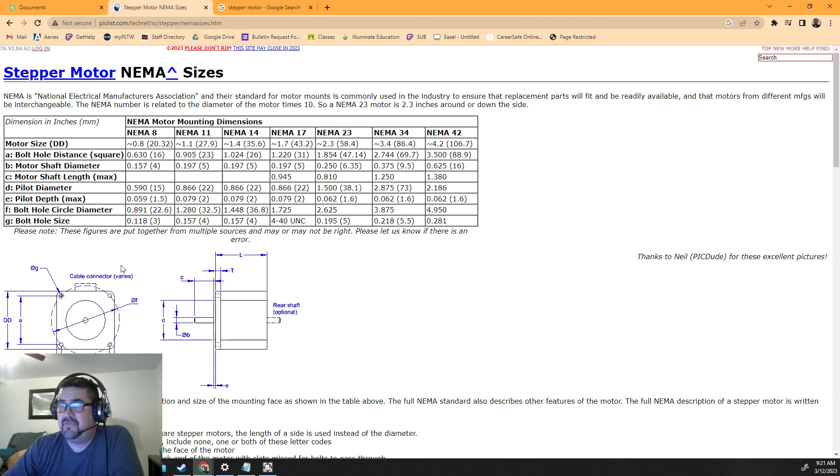I searched bolt pattern on NEMA stepper. Do not always trust these charts. Double check them with a dial caliper. If you're really close to these numbers, these numbers are probably the exact ones.

So if you look at the bolt pattern right here, it says A, let's see if I can zoom in for you guys. This is A right there, and that's from here to here, which is from here to here. It's also A, it's the same thing. And A is right here.

And I think we have a NEMA 17, or is it a 14? I think it's a NEMA 17. That's definitely the most common one. But if that's the one, it's 1.22 inches from one to the next.

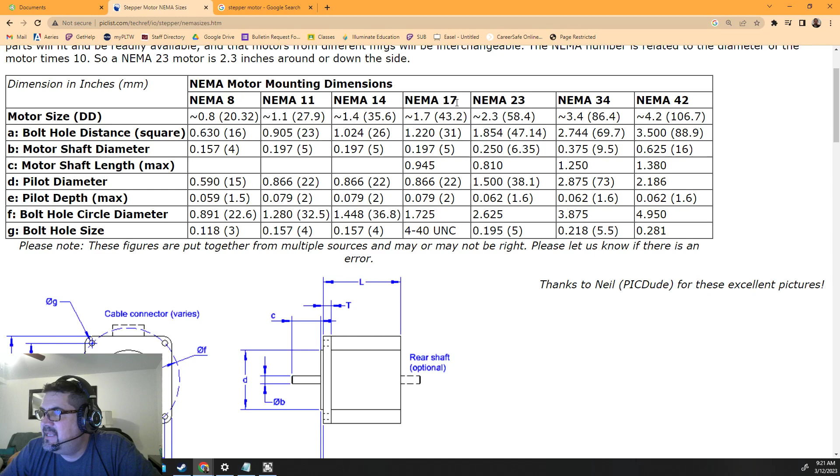What does NEMA 17 mean? 17 is the motor size, or what's called the faceplate size. So this entire faceplate, DD right here, you see this DD, it says DD right here. That's all the way to the top, all the way to the bottom, or from the right to the left, the whole entire plate. The holes, however, are a little bit smaller than that, in between anyway.

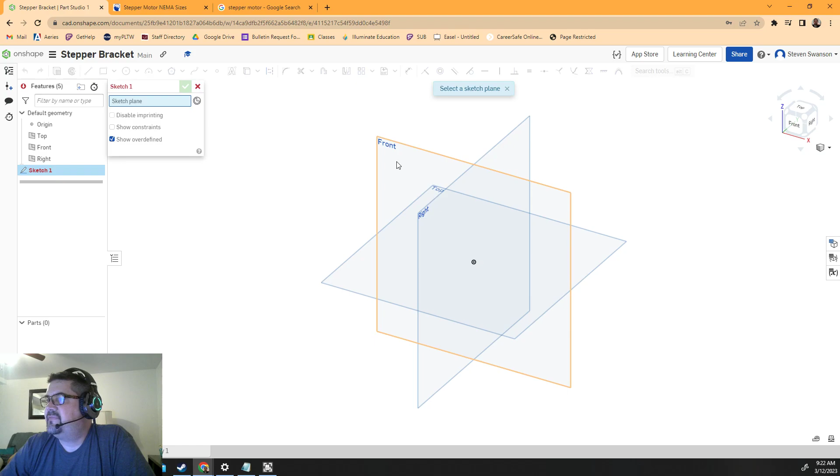So let's go ahead and start doing that. Let's create a document. We'll call it stepper bracket. And here we go. I'm going to go ahead and sketch the faceplate on the front plane, and I'm going to start, everything if you can do from the center works great. For example, I'm going to get a rectangle and say center rectangle, because I'm going to assume that this is like where the shaft comes out, and it makes it easier later on for bolt patterning around a center point, if that's the shaft of the motor right there.

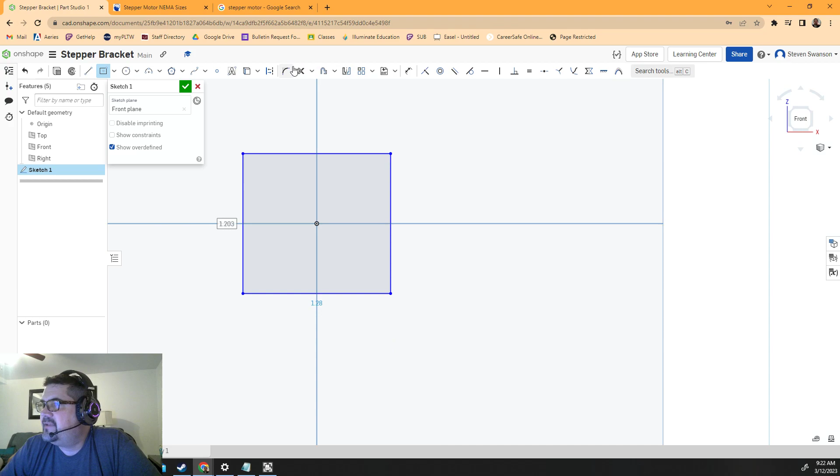Okay, so we know the entire faceplate is on a NEMA 17, assuming that you have a NEMA 17. I don't know what you have, you want to look it up. So this is the entire faceplate, it's 1.7 by 1.7. Okay, so that's the entire faceplate. You can make it bigger than that though, if you want. So this will make it where this is the exact size of your stepper motor.

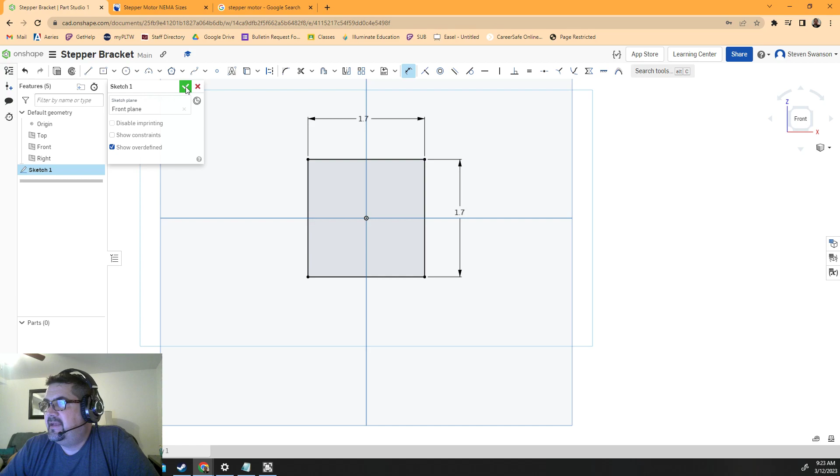Okay, let's go ahead and extrude that out. For me, I'm going to extrude this really thin, I'm not going to make it very thick here. So I'm going to make it like 0.05, and we'll try to strengthen it later on. What else do we need to know? Okay, we need to make those holes, right?

Definitely, so we need to make this distance A right here. Look at D right here, it says pilot diameter. So there is a diameter, this little circle in the middle. They're not showing that circle here, but I think they're talking about that here.

Again, you have dial calipers, go ahead and measure it, how big that circle is. There's this little puffed out circle that comes out right here. You can see it actually right here and right here. It just comes out a little bit.

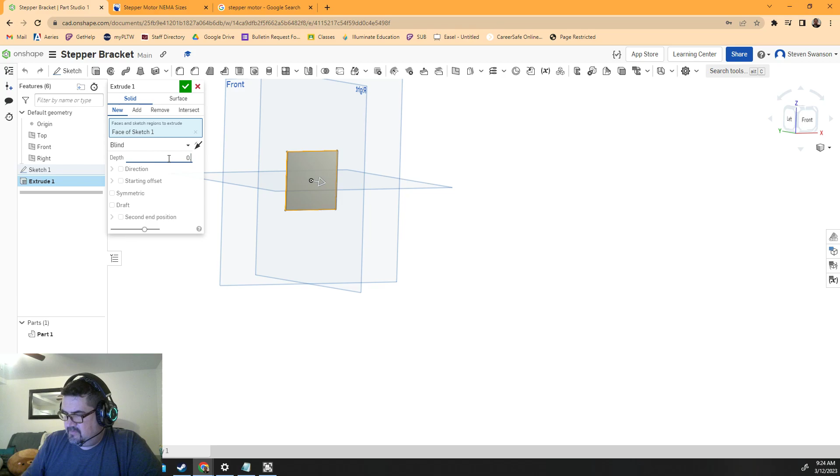How far? It comes out E, which is pilot depth on a NEMA 17, is 0.079. So actually, I think I'm going to go with making my material that thick. I think that'd be cooler, so that the metal's almost flush. So I'm going to round up a little bit, 0.08. I'm going to go back to my extrusion right here and just make it 0.08. I think that'd be really cool, because otherwise it would hang out a little bit, and it should be totally flush to that. So that's kind of cool.

All right, let's sketch the front of this, and let's get to it. Let me make sure I'm doing the right side here. Sketch this side, there we go. I'm not sure if I clicked the wrong side. I'm going to click this thing again, the center rectangle, and click here.

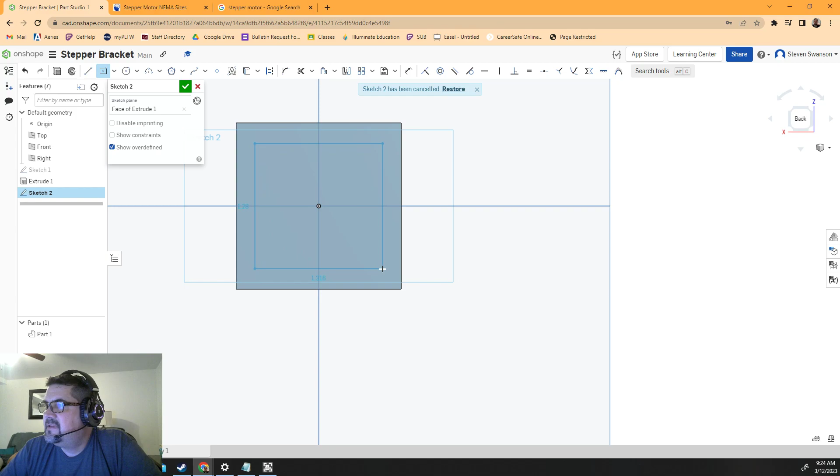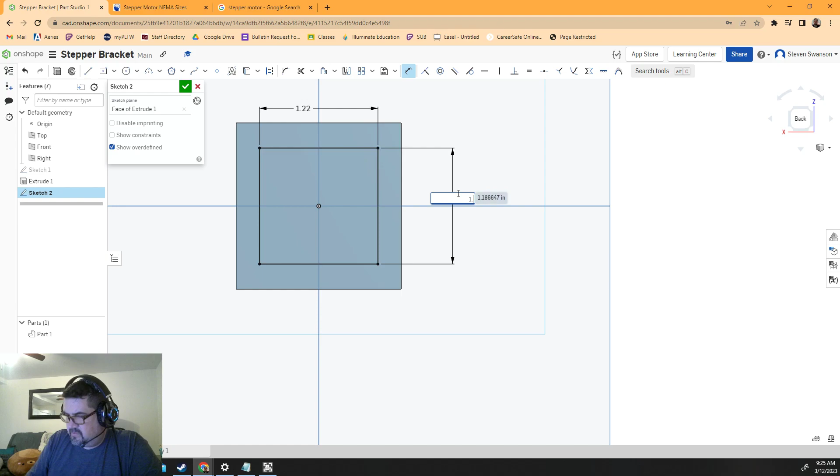And I'm looking for this bolt pattern right here, this A right here, bolt hole distance on a NEMA 17, 1.220. So let's do that. 1.220, and I'm going to make this entire square.

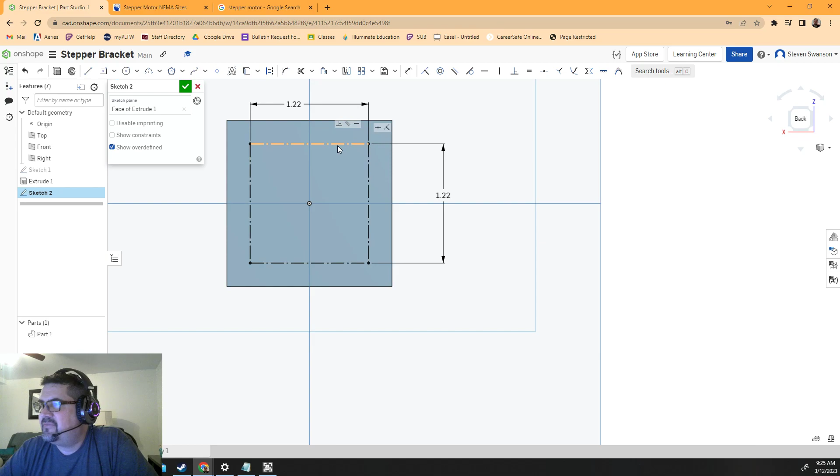How can I select it? I got to push escape. I'm going to click all these lines. I don't need this square itself, like I'm not going to build a square, I just need it to come up with these four corners. So I'm going to make it all construction, in other words, I don't want to be able to mess with it later on, I just need it for a guide for these corners.

You could probably use a pattern feature for this. For me, it's only 4 holes, so I'm just going to go ahead and do that here. I don't know if it says how big those holes are, but once again, you have a dial caliper.

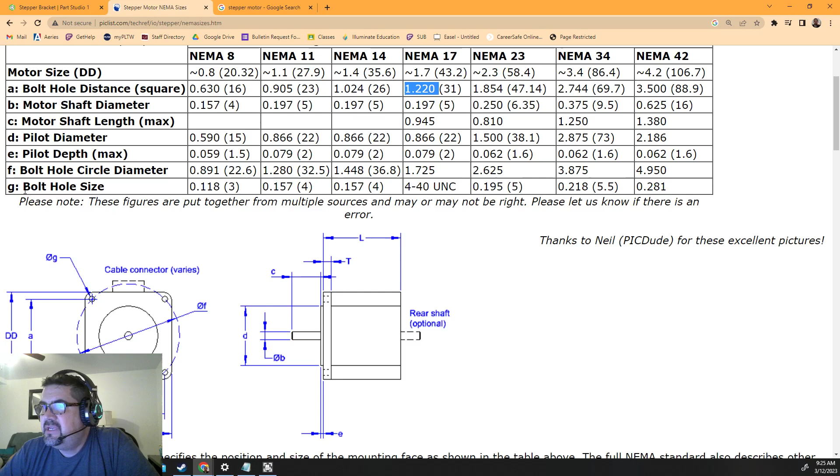You can measure. Here's the diameter of the bolt size hole. It is a NEMA 17, which is a 4-40. Interesting, I always thought it was like an M3 screw. So 4-40, what is that? You can go screw size, screw diameter. There it is, that's the screw.

So I'm going to round up a little bit to like 0.13. Make sure it's a little bigger, just in case, you know, I don't want to be fighting with it later. 0.13, and obviously I'm just going off of charts on the internet.

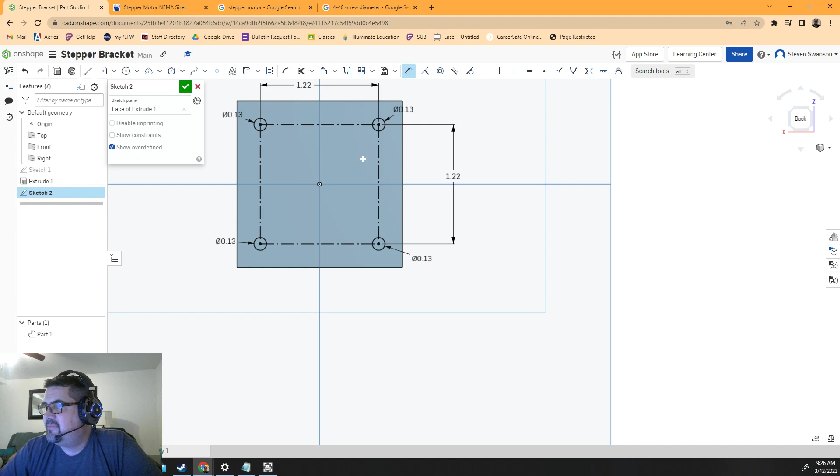I don't have one in front of me. If I had a stepper motor in front of me, believe me, I would measure it, because you know how long it takes to 3D print something, right? I don't want to sit there and 3D print and design all this because I assumed it was all this, when I literally have in class a stepper motor. I have a dial caliper. I could just measure this real quick and double check these numbers. It takes me 2-3 minutes to do that. And then I'm not wasting hours and days printing and then coming back and it's not the right fit. So just measure it, you got it in front of you. Just double check that you're really close to these numbers.

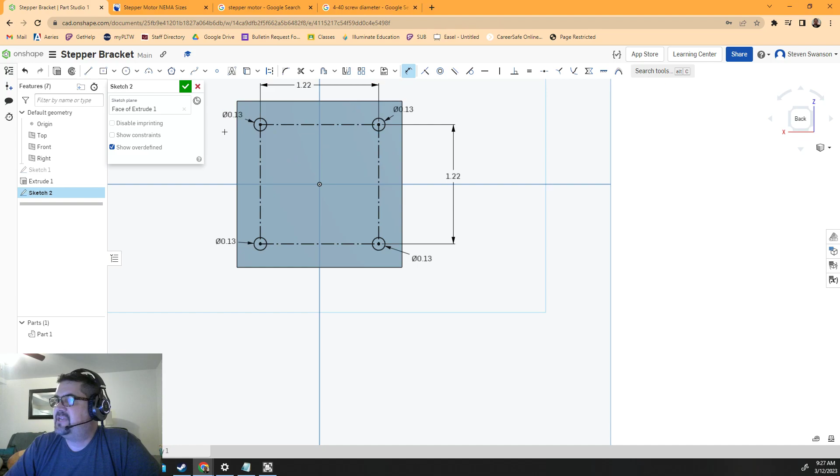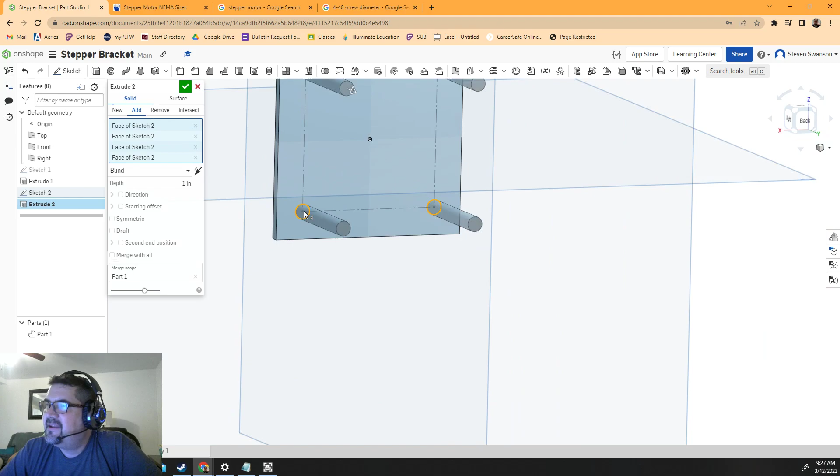All right, so check mark. Let's make those holes. So extrude, we're going to click that hole, that hole, that hole, that hole. Notice the square, I can't click it because it's a construction line, and that's kind of what I wanted. I didn't want this to extrude 3/4 of a circle. Then I have to click that little corner right here. You know, you could do that, it wouldn't be a big deal, but why do that? Okay, so remove, I'm removing those holes. Done, so I got the bolt pattern.

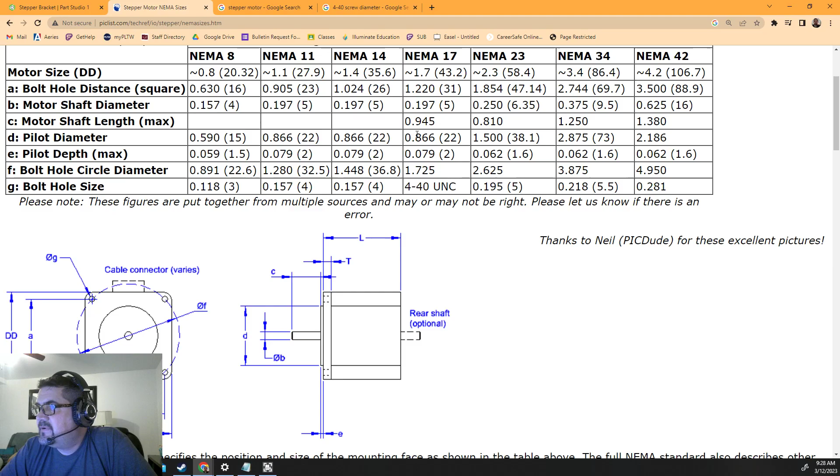Now let's sketch and do that big hole in the middle for the circle, for the shaft and everything. So you could just make a little tiny circle big enough for the shaft, even smaller than that. But you have this big circle right here, I'm pretty sure, that sticks out. Remember, it's this, you can see it right there, this circle. I think all stepper motors have those. And this one is D right here, which for a NEMA 17 is 0.866.

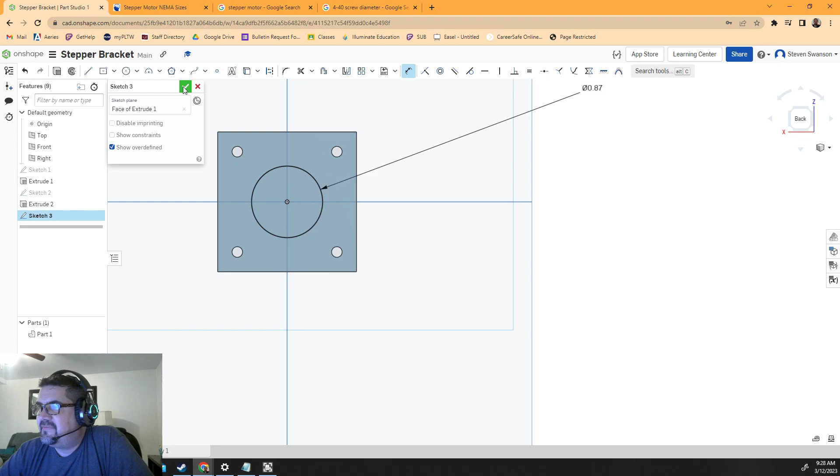So let's go here, 0.866. And like I said, if you don't want to fight this later on, do 0.87. Make sure it's just a little extra wiggle room there where you're not trying to fight it and going, man, I got to sand it now because it's too tight. I did the same thing, I made those a little bit bigger too. All right, so then just click this and extrude and remove, and you're done.

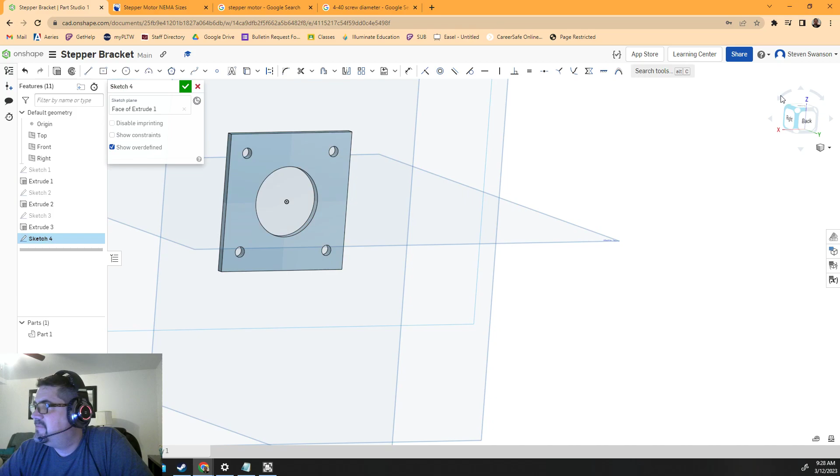And that's it, that's your faceplate. Now, of course, you need a piece of plastic down here so you can sketch this. And I'm going to show you something real quick. Here we go, and I'm going to choose corner rectangle, this corner one, so not the center rectangle. So I can click this corner and click here.

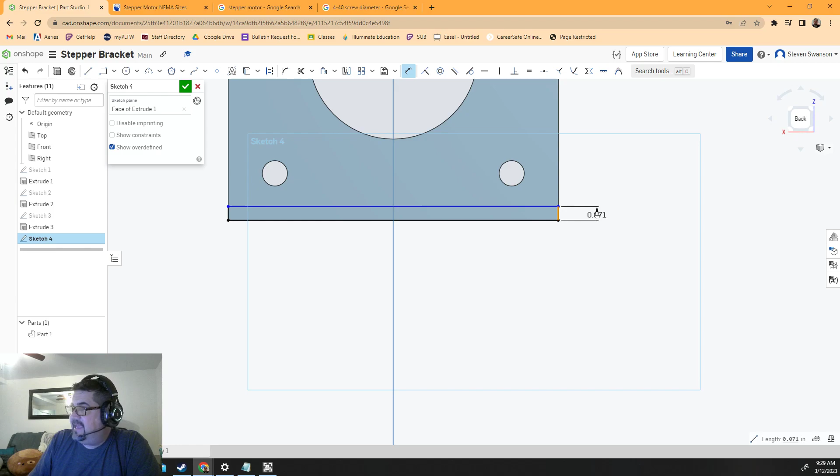And how thick am I going to make this? The same thickness as my other part, which was, I think, 0.8 is what I went with. Oops. 0.8, there we go. Oh, no, it was not 0.8, it was 0.08. There we go. And then I'm going to extrude.

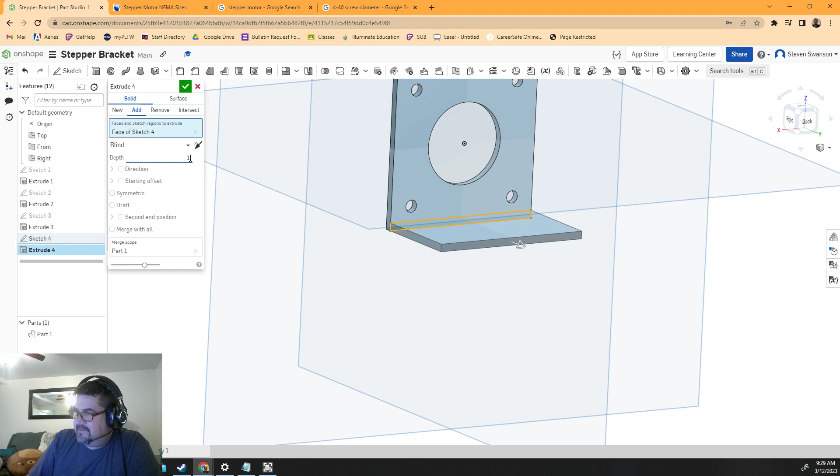And I'm going to put this out, I don't know, 1.7 inches, I guess just like the other side. If you want, it could be shorter, it doesn't need to be the same length. Now this is going to be really weak right here, I mean, it can break on you, you know what I mean? Because it's just barely held on this little spot, 0.08 inches thick.

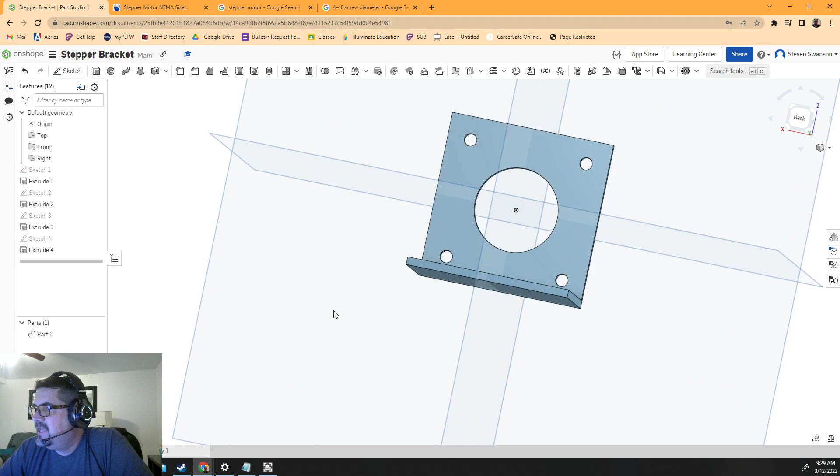So I'm going to create another video on how to move this. Also, we have to fix something right now. Your motor is not going to fit here. I just wasted space right here on this big plate. We made it exactly right, I used space for this plastic part. So now your motor's not going to be able to sit down low enough. This is going to be in the way. So we got to figure that out.

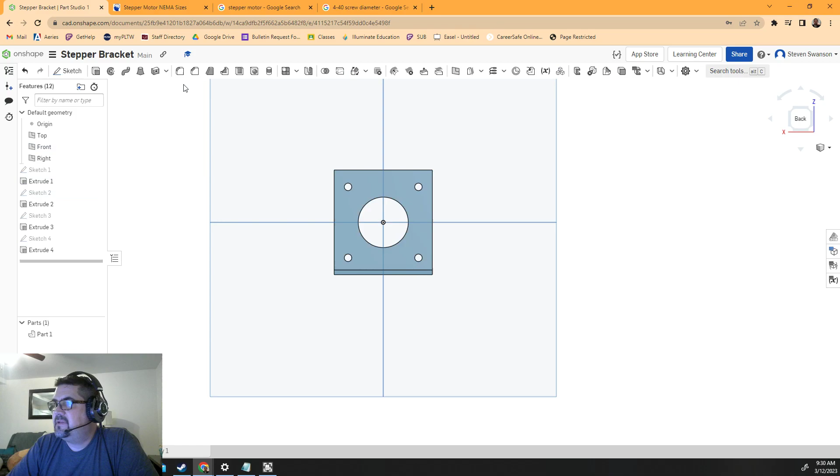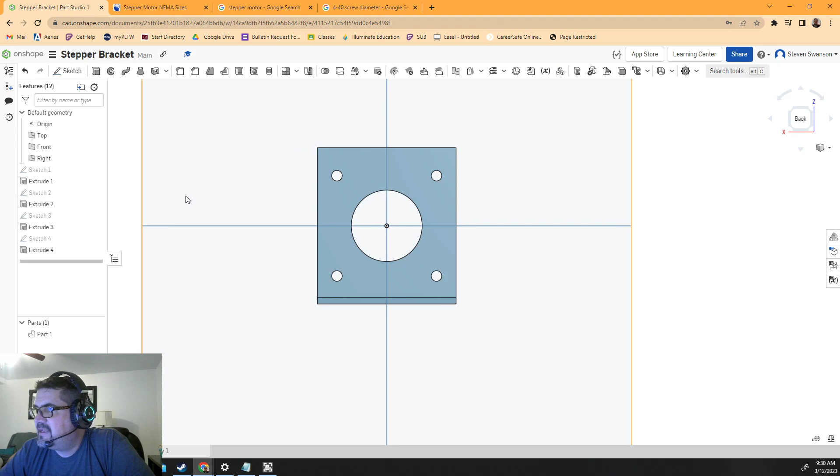So let's do this over here. Let's go to this original sketch and let's create this and go, I don't know, 1.8 bigger, and that should be good. You can actually go a little bit more than that because I just realized it grew up more as well, and because I did the center one, that's why. So I'm going to go a little further, 1.9, and that'll make sure it's safe. I grew 0.1 inches this way and 0.1 inches that way, which is more than enough. And there you go, and that's going to be enough room now down here so that the motor can sit low enough. Otherwise, this plastic piece I did got in the way.

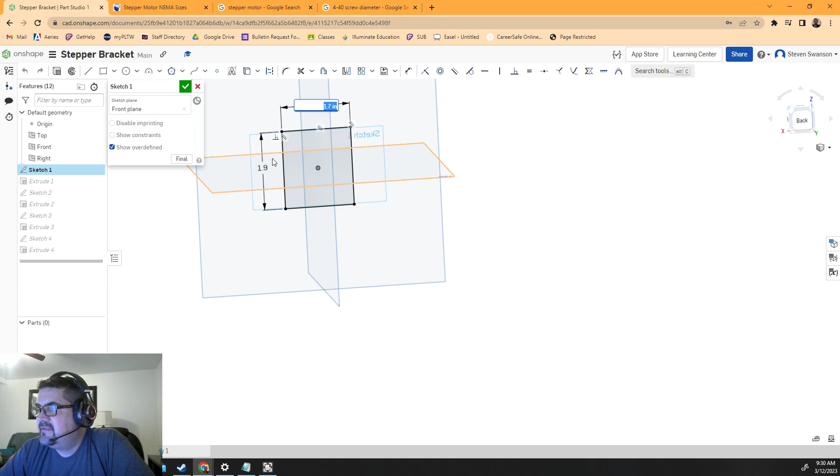So the next video, I'm going to show you how to add wings right here. But to do that, just to let you guys know, you're probably going to need to add a little bit more width then, because now you're going to add wings on both sides, or what they call ribs. Ribs that kind of connect down and make it stronger, okay? And that's it.